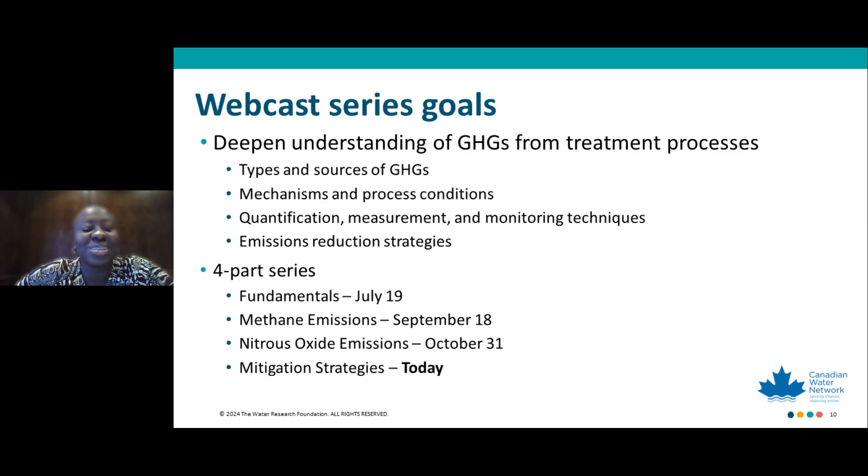For the whole webcast series, it has been our goal to deepen the understanding of greenhouse gas emissions from treatment processes. We have spoken about the types and sources of greenhouse gas emissions, mechanisms and process conditions, and we have gone in depth on quantification, measurements, and monitoring techniques. We have discussed a little bit about emissions reduction strategies, but today is all about emissions reduction strategies. The first webinar took place on July 19, where we discussed the fundamentals of process emissions from wastewater treatment plants. We also talked about methane emissions on September 18, nitrous oxide emissions on October 31st, and today we're talking about mitigation strategies.

A very quick recap of what we've heard. In the very first webinar, we heard about nitrous oxide and methane emissions from wastewater treatment plants becoming more dominant across scopes 1, 2, and 3 emissions as more water utilities switch to cleaner and renewable forms of energy. We also heard about multiple methods that are required to identify and quantify both methane and nitrous oxide emissions, plant scale and site scale. We also identified that there were uncertainties associated with measuring nitrous oxide emissions. But the bottom line is we know enough to start measuring and mitigating nitrous oxide and, to be honest, methane emissions right now.

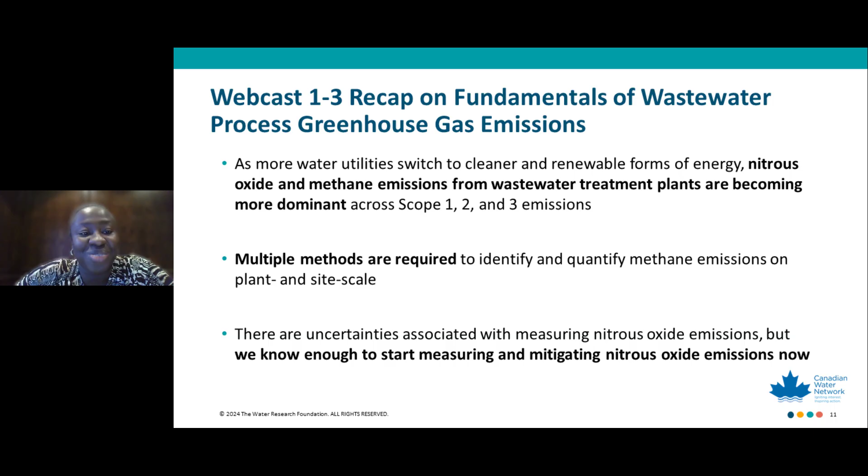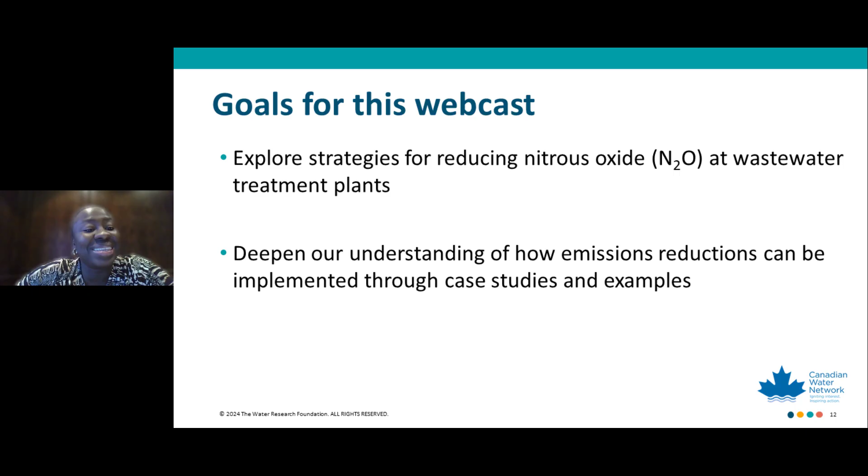Thank you, Jessica. So hoping to provide some inspiration for mitigation for the scope 1 emissions. We're really focusing on nitrous oxide and methane in this webinar. As Jessica mentioned, this is the last webinar in the greenhouse gas series, and it's focused on mitigation. But I think it's also a good opportunity to bring everything together, because as nice as it would be to snap our fingers and immediately start mitigating, there's a lot that has to have taken place and has to be taking place in order to have successful mitigation.

And it really starts with planning. A lot of people think that the first thing you need to do is to measure. Well, that's not true. The first thing we need to do is find out where we need to go and measure and reduce first. This is done using different tools to assess and determine where the biggest potential for emissions is and the biggest opportunities to reduce emissions. Once we've identified where we need to go first in a prioritized way, because we don't want to lose time measuring in places where we find out we can't do anything, since we're under a tight timeline.

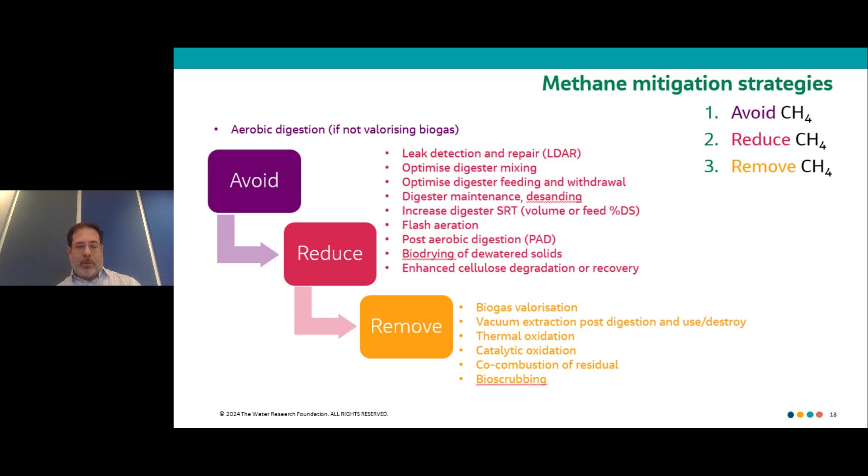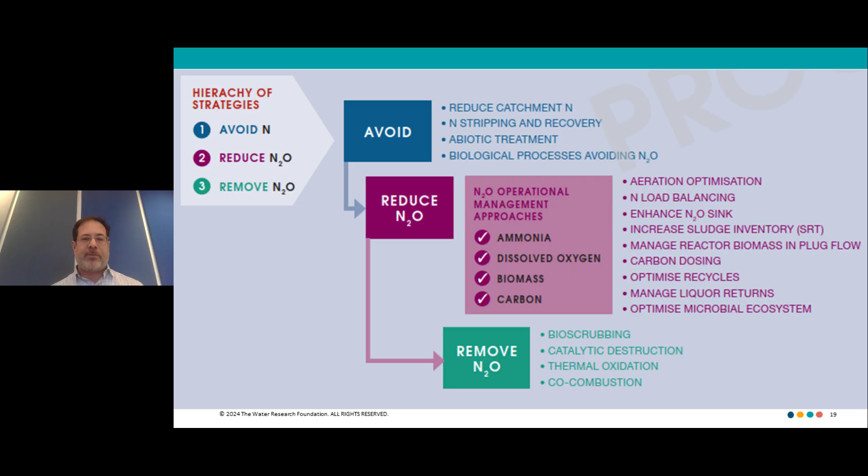And it's exactly the same for N2O. We want to be avoiding, reducing, and removing. And again, there are various actions that can be taken for each of these, but it's important to do what makes sense for your situation.

So getting back to the other components that are necessary for mitigation, for example, knowing where to go first to mitigate and using machine learning for this. We provide machine learning tools to be able to do this. We borrowed a concept from tracking of hurricanes, the use of spaghetti models. For tracking hurricanes, they run various models, the European model, the US model, and others, to find out where there might be consensus among the models. And where there's consensus is where they issue the warnings for the hurricanes.

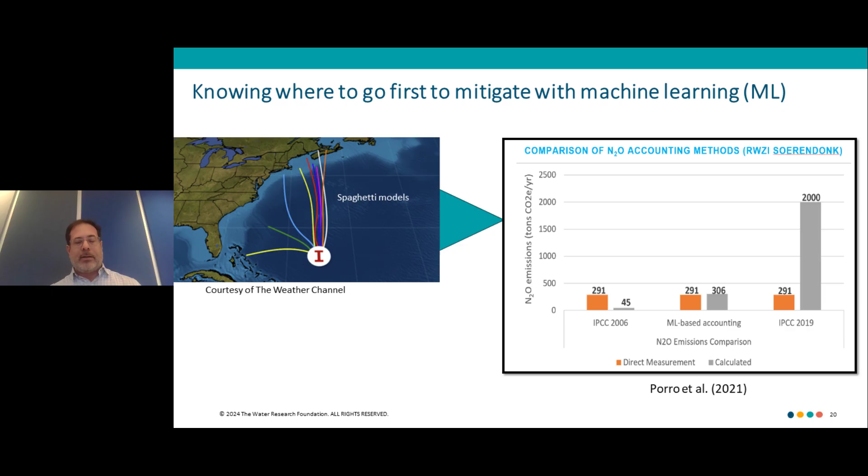So we can do the same with N2O and machine learning models by using an appropriate set of models based on the process conditions and the pathways that we know are occurring. We can see where there's consensus among the models and use this, instead of generic emission factors, to tell us where we need to be going first. It also helps to get a good estimate of the N2O emissions, but it's not intended to be perfect. The idea is to guide us where we need to be going to measure and reduce first.

So this is using machine learning, but we can also use AI for this. We use knowledge-based AI to quantify the risk of N2O formation. This uses data such as dissolved oxygen, which is widely available and is also the most important factor because it dictates which pathways will be occurring. We've used this to identify mitigation strategies at a granular level, but zooming out, it is also helpful to tell us where we need to be going first, because we've seen a strong correlation between the risk and the calculated N2O emission factors using the measurement data.

We have also seen that this works even better if we take into account removal efficiency and the population equivalence, because the removal efficiency is a measure of how hard the plant is working. The overall risk tells us under what conditions it's working hard or not, and the population equivalence is an indicator of the load, how much work is actually being done. Doing a lot of work in the Netherlands over the years, we've been able to validate this.

So we also can use AI. Once we're at a specific site, now we know where we need to go. We can use AI to help us identify mitigation strategies. A lot of times we look at data like this, or we have N2O measurements, and we plot it with process data like the dissolved oxygen and the ammonia.

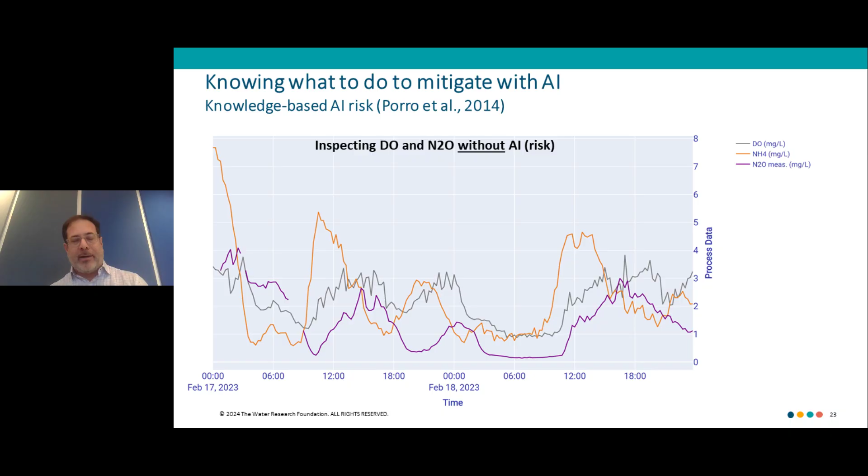But we're in 2024, and if AI can make our lives easier, we use AI. So we want to use AI for N2O. And if we plot the risk now on top of this, it boxes out exactly where you have the problem, N2O increasing. At this level, it's kind of hard to see what might be going on, but we can use the outputs at this level to verify that this is a pattern. We see consistently N2O going up under these peaks of risk due to high DO conditions.

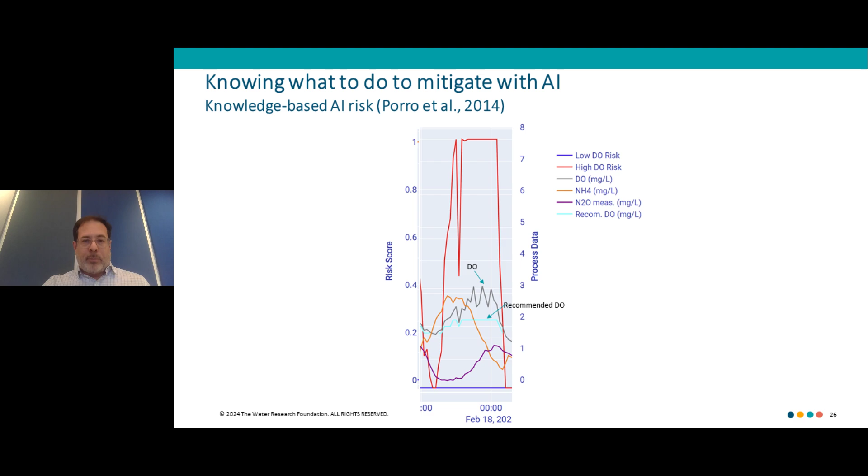But then the idea is to zoom in to one of these peaks and see exactly what's happening. So here we're converting ammonia under this peak of high DO risk, and we see the N2O coming up as this is being converted. So we know that this is because the DO is too high. We look at the DO and we can see at times it's going up as high as 3, and we can see what the recommended DO is. The idea would be to still bring this ammonia down, but avoid this N2O from increasing. And we've achieved up to 90% reductions following this in summer, winter, fall conditions. So it's now just a matter of doing it.

Something also that's really important to keep in mind is the use of emission factors, or should I say the misuse of emission factors for tracking and verifying mitigation. Because we've seen cases where if we're tracking the emission factors and the risk and the emissions, we can see how the emission factor changes over time, which we know to be true. But we also see cases where the emission factor can actually go down, but if you see here, the emissions are actually going up. And that's because to calculate the emission factor, we're taking the load into account.

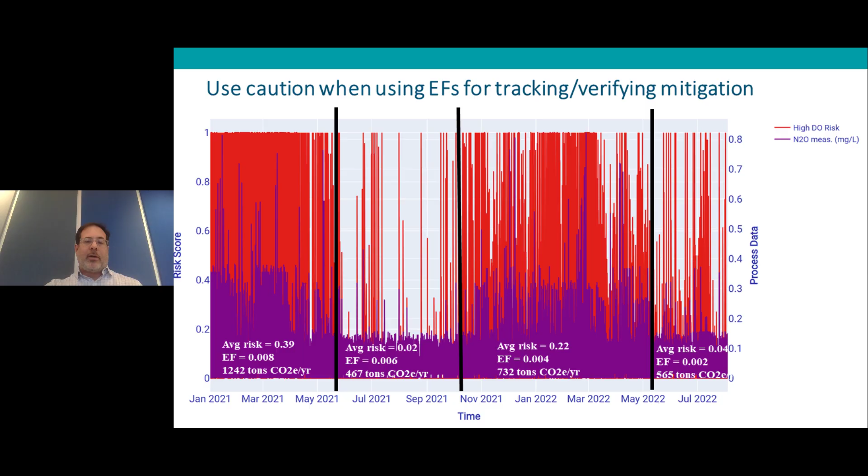So depending on the ratio of the N2O emissions and the load, you can have a situation where you have an emission factor go down, but your emissions actually go up. So for tracking mitigation, it's important to track the actual emissions. But again, it's also helpful to look at the risk, because we consistently see the risk be a good indicator.

And so we're also thinking about how to measure and verify the reductions. The current thinking now is that you have to measure for a full year and then take action, because then whatever reduced emissions you have after implementing interventions, you're comparing to the previous year's emissions where you didn't implement interventions, but you lose a whole year by following this. So what we do is we baseline and reduce at the same time.

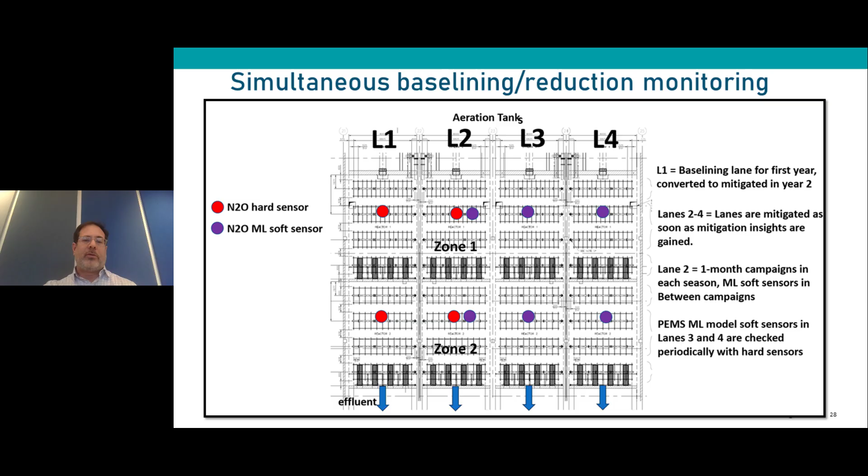So we designate one lane as sort of like the control lane, where we don't touch it. We're monitoring the N2O in this lane, and the parallel lane. All the other parallel lanes, we implement the interventions and are monitoring physically. So you see red are with physical sensors, but because we're always limited by cost, we also are using machine learning soft sensors, which are the purple ones, to verify what's happening in the other lanes and to verify that we're continuing to reduce.

So the key takeaways are that mitigation is an ongoing journey. It's continuous, it's not finite. It's important to follow best practice. It's important to leverage the tools that are available so we can do it effectively and efficiently. It's important to know where to go so we don't lose time measuring where we can't implement mitigation actions. And it's important that once you are at a site that you're baselining and reducing at the same time so we're not losing a year.

When tracking mitigation, we want to track the actual emissions and not the emission factors. We can track both, but if we want to verify mitigation, it's important to track the emissions. We see that AI and machine learning can be invaluable tools.

It's also important to recognize that we now know enough to start taking action and implementing these technologies and applying this knowledge in practice. We no longer have to wait for research to take action. We can continue research to advance the technology, advance the knowledge, but we don't have to wait to start taking action. It's important to keep in mind that it's not just about reducing. We should be looking to avoid, reduce, and remove. And it's important to keep in mind that we are under a tight timeline, and that every ton of CO2 counts.

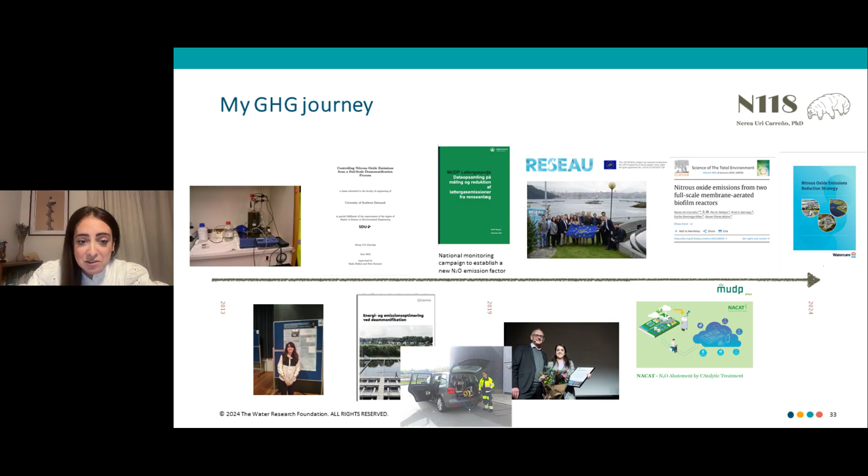So I want to start by taking us back to why utilities are doing this today, and want to remind us that this is, until now, very much voluntary efforts done by utilities. We might have legislation coming to Denmark next year, but we still don't know how that's going to look. But it's motivated mostly by decarbonization goals.

And if we look at the big scheme of things, N2O from the wastewater sector might not be a huge contributor, but when we look at specific facilities and specific utilities, then N2O can take the largest contribution, and that's certainly true for the Nordics, and that's why it's been such a hot topic for the past decade or so.

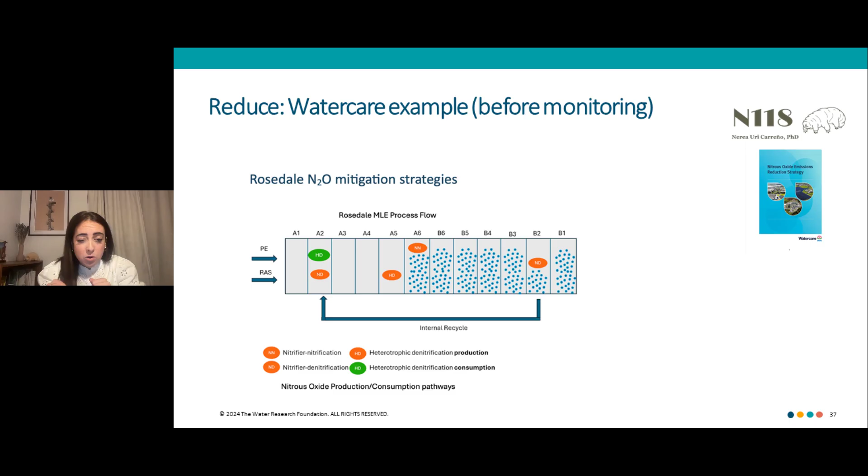So this is an exercise that we did with Watercare in Auckland, New Zealand, for their nitrous oxide emissions strategy that was published this year. This document is public and open. We looked at the processes and where the risk was and put together a list of mitigating actions, even before there was any N2O data, looking at these few handles that we have.

What can we do in terms of aeration? What can we do in terms of ammonia management, carbon, biomass, which mostly is SRT control? And then looking at what potential these actions could have, and what actions the utility could take. What are the constraints? Usually when we work with N2O, we find out that sometimes equipment is limiting: blowers that are too big or too small, valves that cannot do what we want them to do, etc.

Now I'm going to present a couple of examples from my work at VCS over the years. This is a very old example, working with the sidestream Anammox reactors. I think this is 2017. We've always had very high emissions from these sidestream reactors, probably mostly because of the way we operate them. But they've been historically very high.

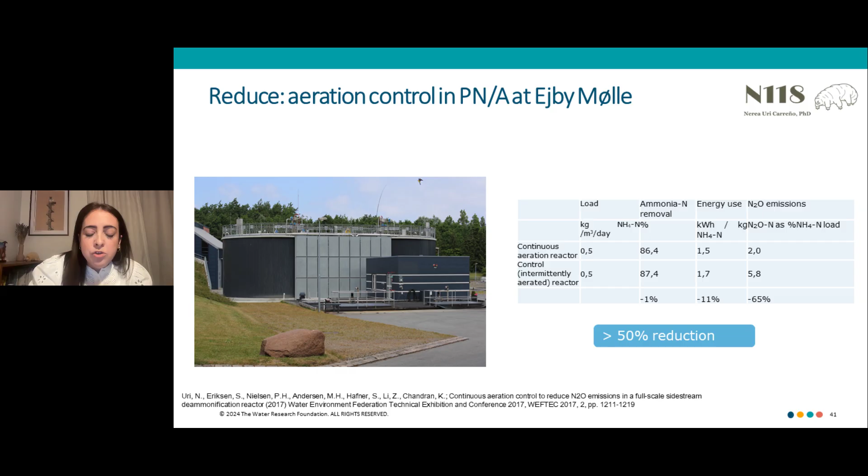So we've tried over the years a couple of different projects to better control these reactors, and we've managed successfully to come down in those emissions. And when we do these projects, we're always looking at these co-benefits. So we want something that's going to reduce N2O, but it's going to give us at least the same performance, effluent quality, and even, like in this case, slightly better energy use, all those co-benefits that I think usually come with reducing N2O.

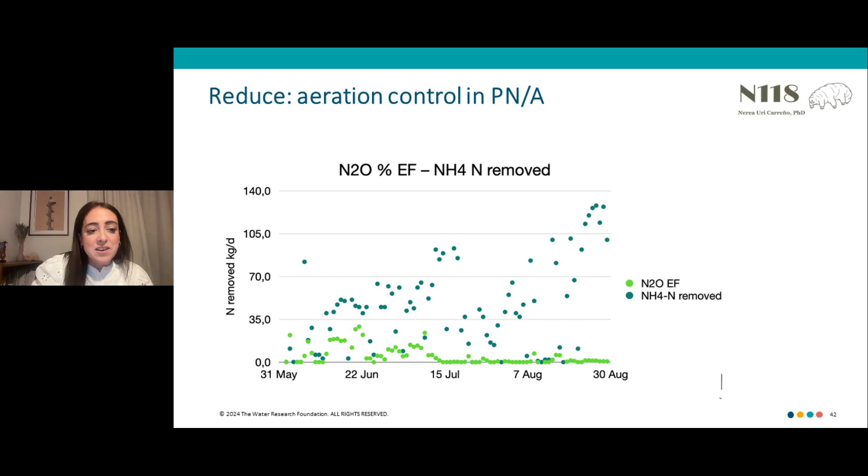This is another example from the mainstream at Ejby Mølle, also with VCS. This is a funny example because we were monitoring the reactors because of a national emission campaign. So we were supposed to get the national emission factor for Denmark. And when I get the data set, I'm like, wait a second, there's something wrong here around May. What happened? There was a lot of N2O, like a lot of N2O.

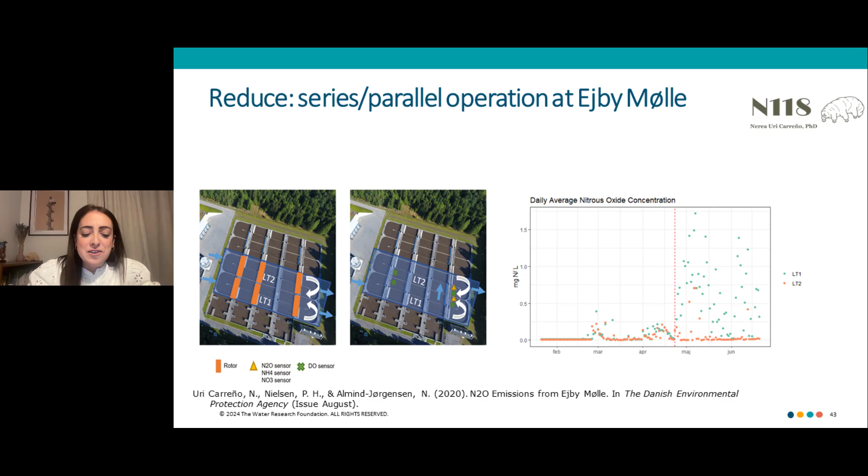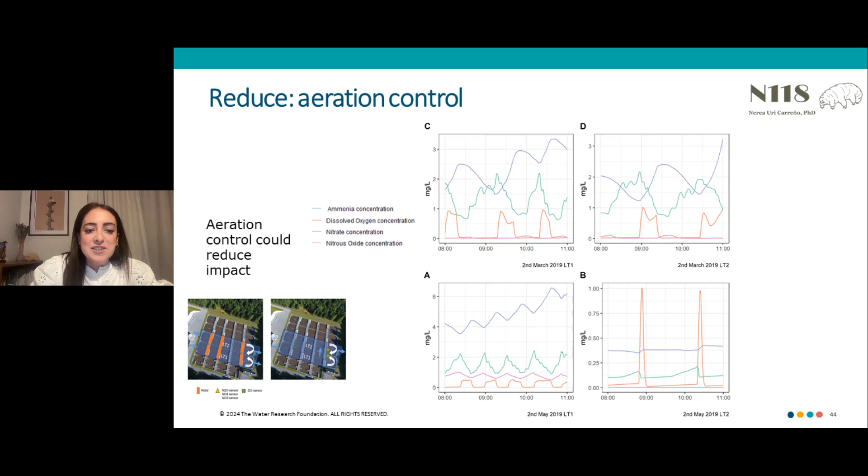And turns out operations had changed the reactor operations from parallel to series, and they didn't change the controls. So they didn't change the aeration. So before we had these two reactors working in parallel, very steady, very happy, nitrate under control. And when they changed operation without changing the aeration set points, this one reactor now gets double the load, and it's trying to keep the ammonia in place. And of course, it's working overtime. It's stressed. It was producing a lot of N2O. So again, usually good N2O comes with good performance.

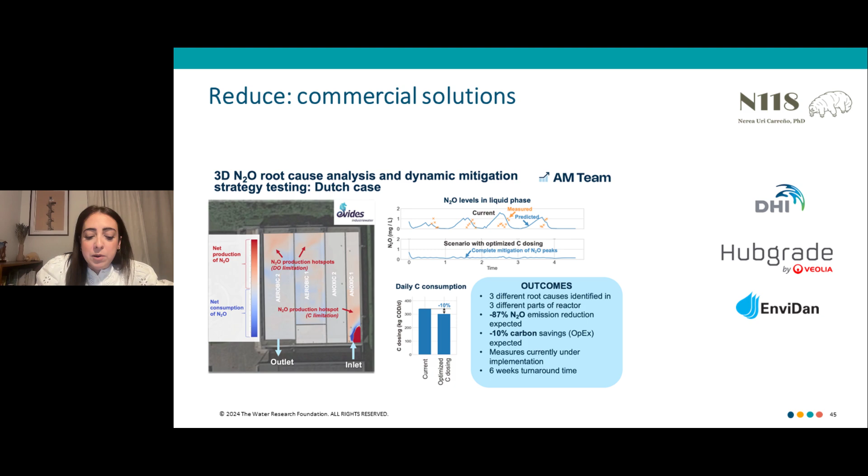And these examples are just all the human intelligence and process engineering, but as Jose said, there's commercial solutions, and he's got one. AM team has a combination of CFD and biokinetic. There's the twin plant with DHI, Veolia, and EnviDan. I think Jens Niras is going to present. So there's a lot of solutions out there that are going to come implementing controls that are specifically tailored for N2O. And I think we're already seeing a lot of success in here.

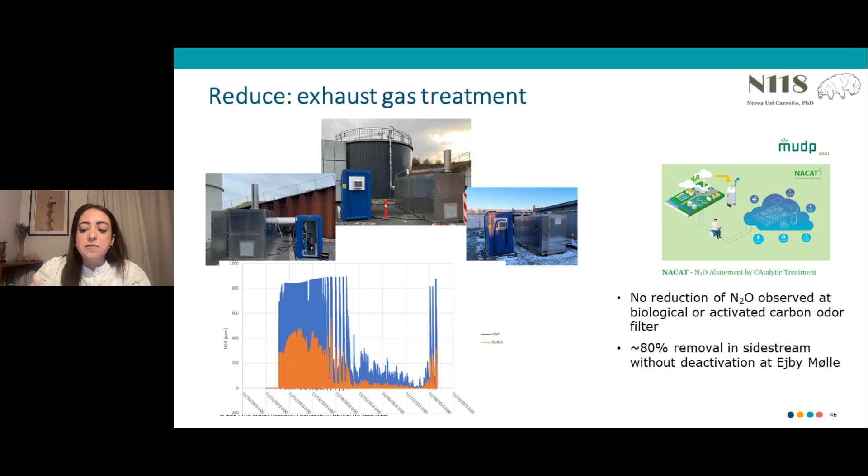If we move forward, we've done everything. We've reduced all we can. What are the next things we can do? We had this project last year where we tested catalytic treatment of the exhaust. And we saw that for very specific cases, in our case, for our side stream, and potentially MABRs with very reduced airflow streams, this is going to be a very interesting solution for the future. But it's going to come at a cost because we have to heat up the gas up to 400 degrees. So potential for the future, but the feasibility will be very case specific.

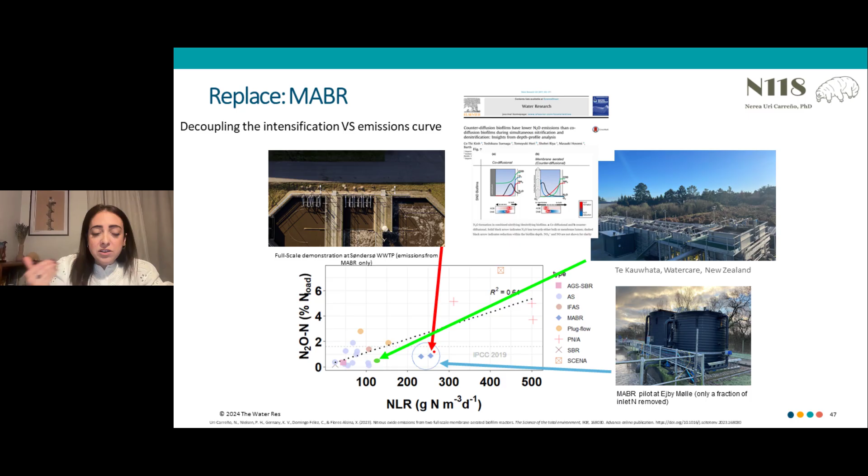We've done a lot of reduce. The next thing, also looking into the future, at some point when we get confidence enough that these technologies really are better than something we're comparing with, like, for example, one-stage side stream versus two-stage side stream, or MABR, which I'm not sure is fully proven right now that is better for N2O, but if there's one technology that I think has the potential to be intrinsically better than the other ones for N2O, it's probably MABR.

Take-home messages. This is still very voluntary for utilities out there, so it's all out of goodwill. A lot of utilities doing a lot of good work. We usually get win-win situations when we start looking at N2O, when we learn more about our processes and we get co-benefits out of it. There's a lot of successful case studies out there, but you're not going to find them in peer review literature, because they're now at commercial stage, with several companies already working with this, and also utilities doing it in-house.

I think once these technologies and processes get more mature, utilities are going to have to look at what is the price of the N2O that we're mitigating, so that we are making smart decisions in this area.

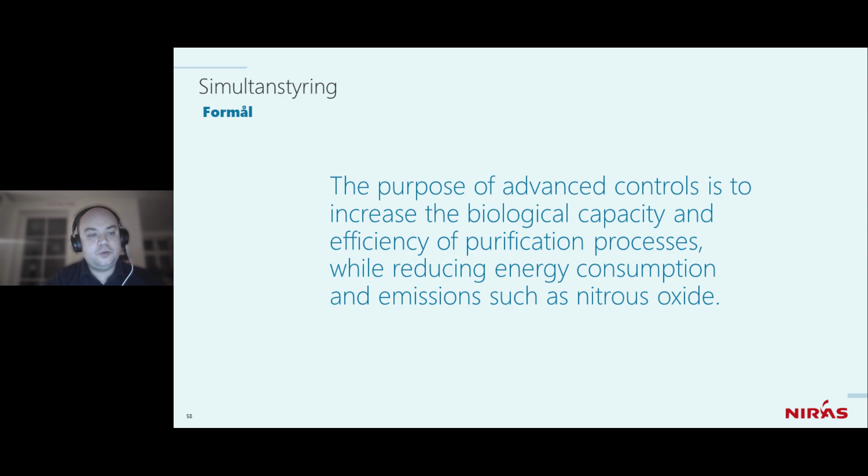But I'm going to talk, like Nerea said, a little about how to reduce nitrous oxide in a traditional biological system. And by that, the purpose is to be able to do advanced control, to increase the biological capacity and efficiency of the purification process with some simple controls at a wastewater treatment plant. So the base of this is actually to use simultaneous nitrification, denitrification, trying to control the ammonia rates to be as small as possible.

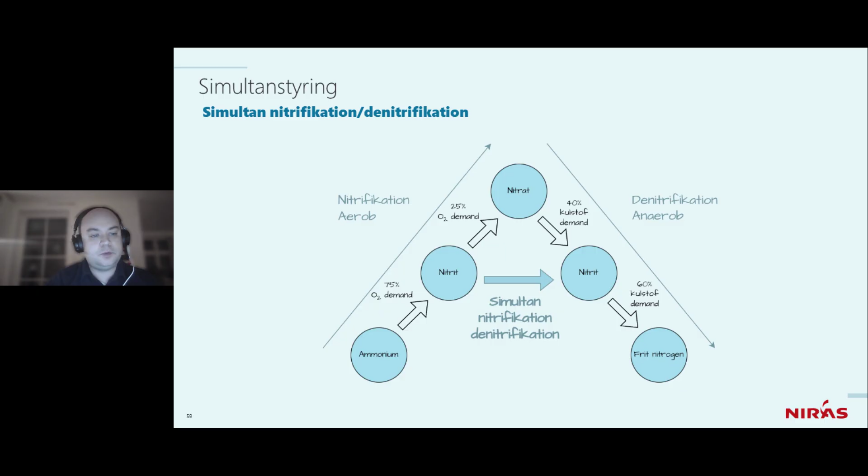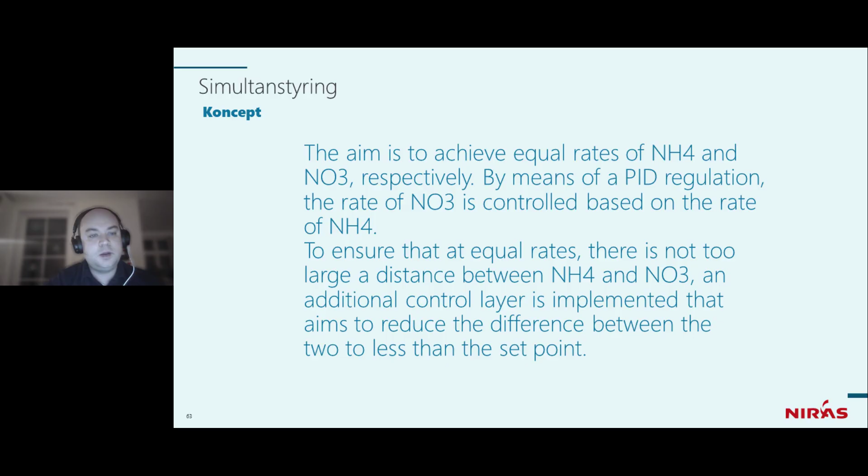And when we do that, we get a smoother movement. Sorry, I just need to go there. Yeah, so we have made PID regulations directly in the PLC of a treatment plant to try to make the rates of ammonia and nitrate be the same. And when we do that, we know that if you can decrease the ammonia oxidation rate, we also can decrease the N2O production.

So to do that, we are actually just getting more flat rates and less oxygen in the tanks, but at the same removal efficiency. And when we do that, we get a lot better solutions for nitrate reduction. So I would briefly take you through the results of the nitrous oxide reduction. So we have done two similar periods with same load and same setup in the PLCs of the SCADA system. And when we do that, we get much less nitrous oxide emission.

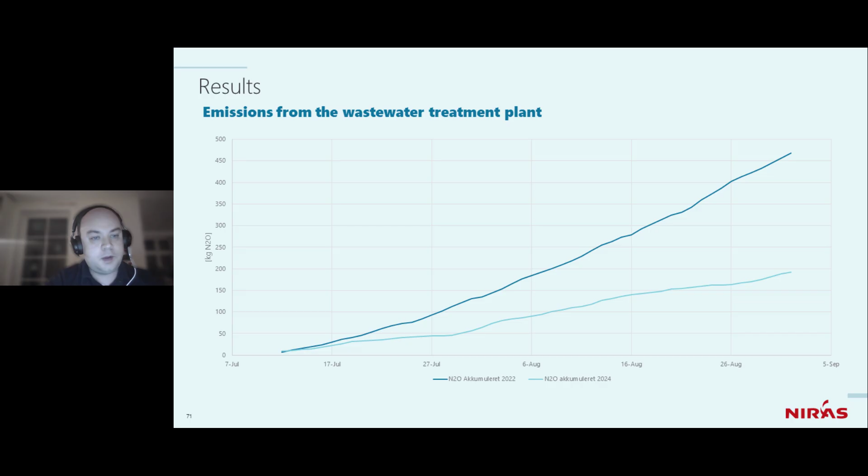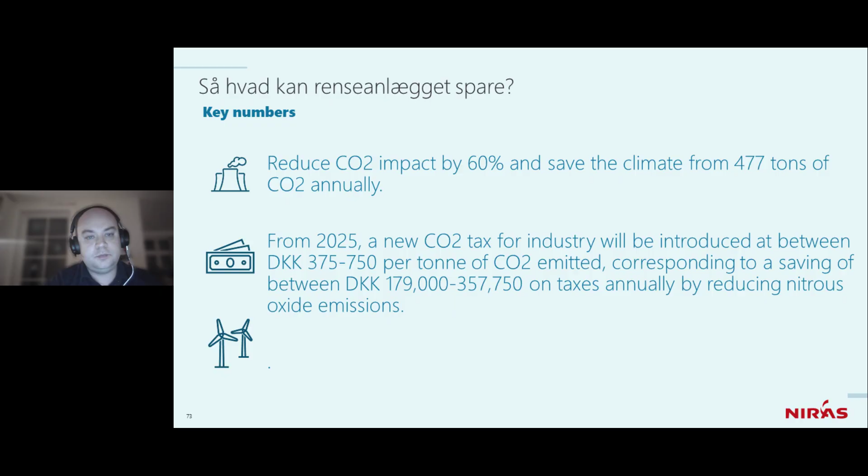So the dark blue one is the baseline for ordinary control, and the light blue one is the one when we do a rate control based on ammonia. And if we do that, we get less nitrous oxide emissions from the process tanks, and we're actually going to save about 60% of the nitrous oxide climate impact, and that equals about 470 tons of CO2.

Yes, that was a short brief on how to try to mitigate with existing equipment, and we think we have been pretty successful in this, and actually shown that even though they are getting new limits for nitrous oxide in Denmark, at this plant they are not getting a high bill because of the pre-phased mitigation.